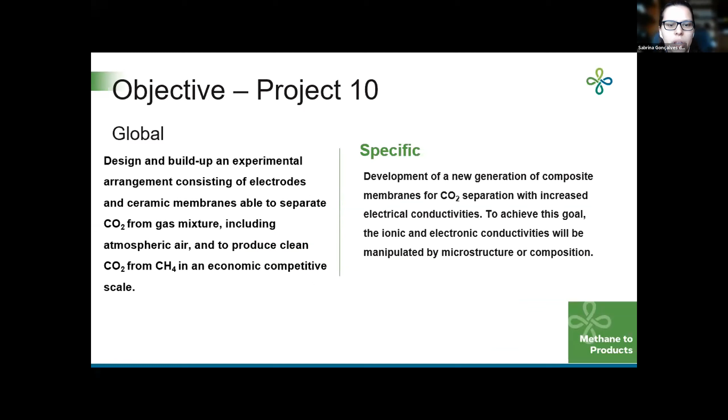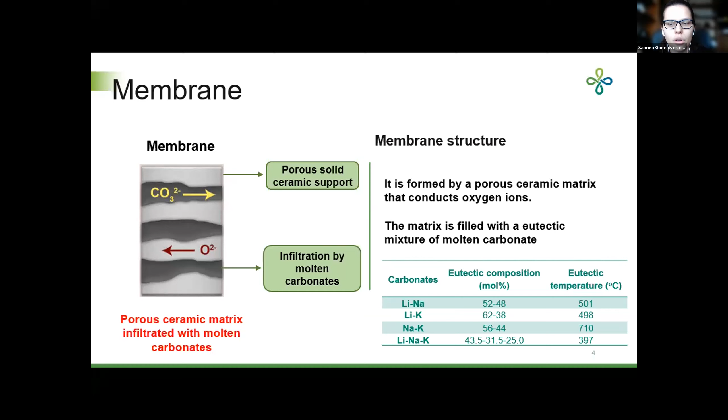So this image is a simplified sketch of the membrane. It's formed by a porous oxygen ion conductive ceramic matrix that is filled with a eutectic mixture of molten carbonate. So this matrix can be produced using different methods, such as cold pressing, tape casting, deposition, and many others. But the important thing is that after sintering, it remains porous, so it can be infiltrated by the molten carbonate. And usually, eutectic mixtures of carbonates are used to lower its melting temperature. And it's possible to choose the best mixture depending on the temperature of use and the conductivity of each one.

So how does the membrane work? The separation mechanism is based on the surface reaction between the CO2 from the feed side with the oxygen ions from the ceramic phase to form the carbonate ion. This carbonate ion is transported through the membrane to the other side, and the reverse reaction occurs, releasing CO2 on the permeate side and the oxygen ions back to the ceramic phase to start the reaction again. So the driving force of this permeation process is the difference of the partial pressure of CO2 on each side of the membrane.

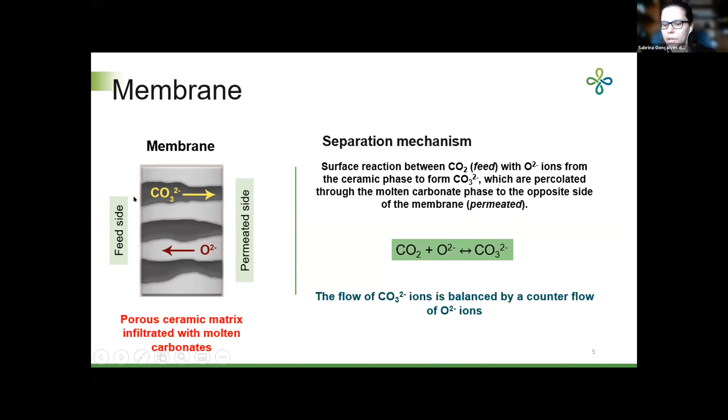So in practice, we can consider that these two phases of the membrane are like parallel cells with ionic resistors and cell thermodynamic voltage associated. This is a simplified electrical circuit here. And since there is no current flowing outside this electrochemical cell, this formal parallel arrangement, in fact, originates a series type association. And for the CO2 to be transported through the ceramic membrane, the flow of carbonate ions needs to be balanced by a counterflow of oxygen ions.

If one of the resistances is higher than the other, the membrane efficiency will be limited by the most resistive component, that in this case is the ceramic phase. So have in mind that the permeation rate of the membrane is limited by the high resistance of the ceramic. To improve the efficiency of the membrane, we need to improve the conductivity.

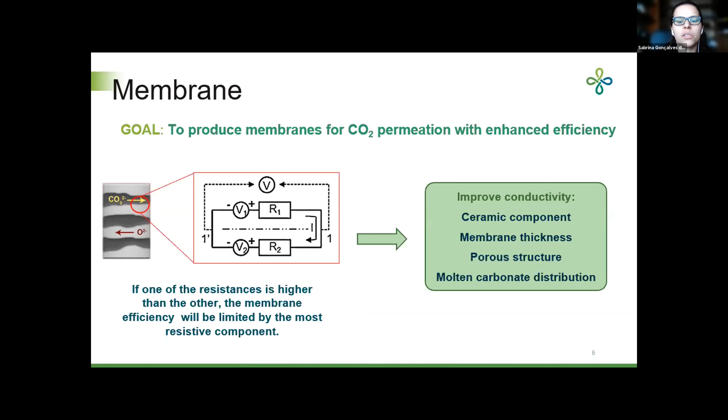With that in mind, we can think of different strategies to improve the conductivity, such as changing the ceramic materials to be used, or somehow improving the conductivity of these materials, decreasing the thickness of the membrane, and maybe changing the pore structure in order to decrease the tortuosity, and also studying the molten carbonate conductivity and distribution inside the membrane. And so considering these parameters, to improve the conductivity and the permeation, we came up with some strategies in order to improve the final membrane.

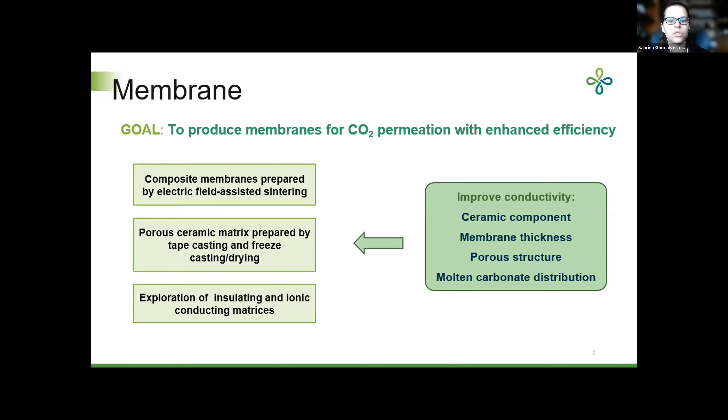And today I will present the main results that we have so far on composite membranes prepared by flash sintering and also the results obtained from the preparation of porous ceramic matrices using tape casting and freeze drying techniques, where we could decrease the thickness of the membrane and also change the pore structure. And we also are studying the use of insulating and ionic conductive matrices to investigate the conductivity of the molten carbonates.

So first, I will present the results of composite ceramic membranes prepared by flash sintering. The purpose of this work was to obtain the membranes using flash sintering and produce membranes with increased conductivity using lower sintering temperatures and a simplified processing.

So the materials used for the membrane were Gadolinia-Doped Ceria for the ceramic phase and a eutectic mixture of sodium lithium carbonate for infiltration. And the membranes were prepared by two different methods. The traditional one, where we cold press the mixture of Gadolinia-Doped Ceria with a pore former. Then the pellet was sintered and infiltrated with the molten carbonate.

And also the sample produced by flash sintering, where we prepare a mixture of Gadolinia-Doped Ceria with the eutectic mixture of carbonate. This mixture was cold pressed, and the sample was positioned between two platinum electrodes connected to a power supply, applying an electrical field of 200 volts per centimeter at a temperature of 420 degrees C to produce the dense membranes.

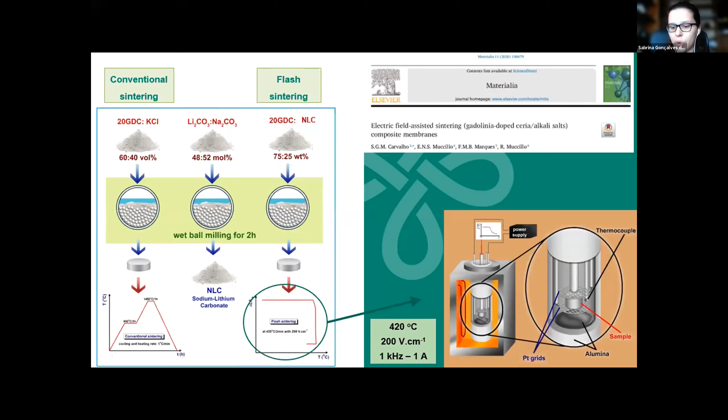This is the Arrhenius plot of the electrical conductivity of those samples. In blue, we have the electrical conductivity of the composite membrane produced by flash sintering, by infiltration in green, and a pure dense Gadolinia-Doped Ceria in red. It's interesting to notice that the electrical conductivity of the dense GDC exhibits mostly a linear behavior in the entire temperature range, showing that the electrical conductivity of the sample is dominated by the conduction only of oxygen ions.

And the ceramic pellets containing carbonate have dominant mechanisms depending on the temperature range. At temperatures below 400 degrees C, the conductivity is basically due to the oxide ions. From 400 to 500 degrees C, the electrical conductivity increases steeply due to the contribution of molten alkaline carbonates. And at upper temperatures, the conductivity follows again an Arrhenius behavior, a situation ascribed to the carbonate and the alkali ions using the molten salt pathway.

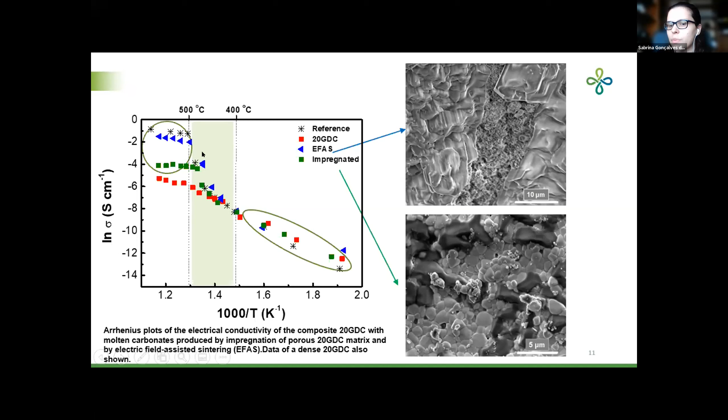So the samples produced by electric field assisted sintering in blue showed a higher conductivity than the samples obtained by infiltration, as we can see here. We do not have yet the permeation results for the membranes produced by this method, but the conductivity results allow us to expect good values.

Now the results of the membranes produced by tape casting and freeze drying. These samples were prepared during a period of 6 months that I spent at Forschungszentrum Jülich in Germany in the first semester of last year. And during this time, it was possible to prepare the samples and begin some characterization of the material.

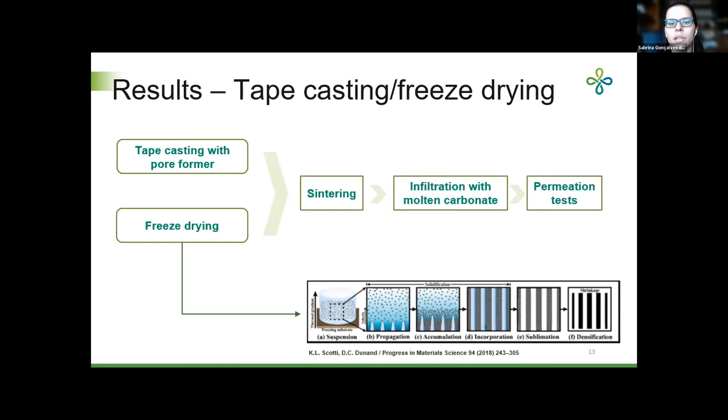So in this work, we also use the same type of powders, Gadolinia-Doped Ceria as ceramic powder and sodium lithium carbonate to infiltrate. Basically, the samples were prepared by tape casting using rice starch as pore former, and also porous matrices were prepared by freeze drying, which is a technique that uses water and rapid unidirectional freezing to produce those aligned pore structures. Both samples were sintered, infiltrated with molten carbonate, and the permeation tests were performed.

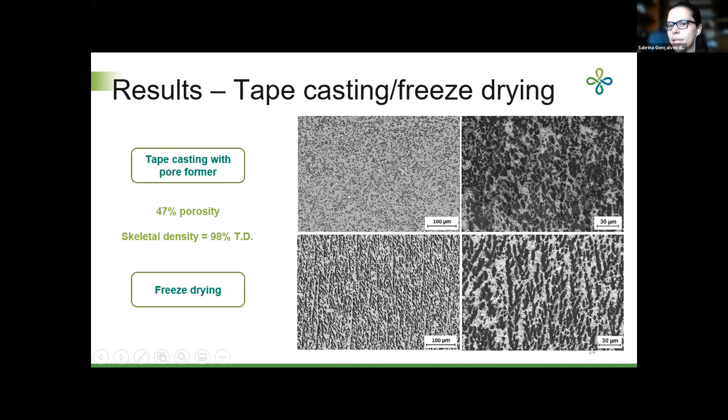So both tape cast and freeze-dried samples had similar values for porosity and skeletal density, but we can see in these images that the pore structure is significantly different. The pore structure of the freeze-dried matrix has more aligned pores in one direction, while the tape cast samples have randomly distributed pores.

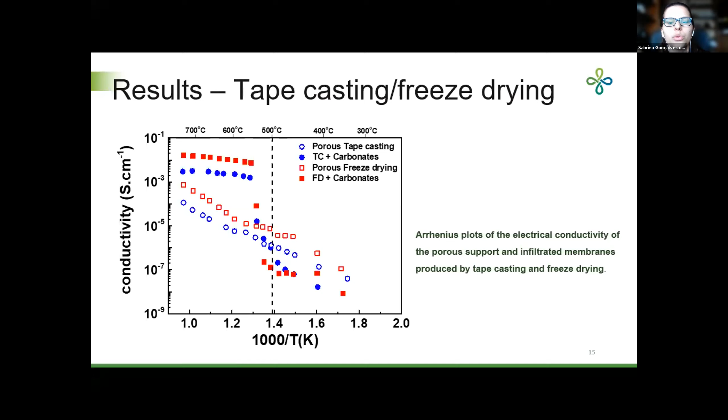What is interesting to notice here is that the freeze-dried samples showed a higher conductivity for both porous support and infiltrated membranes due to their aligned pore structure and consequently lower tortuosity of the charge transport across the transport direction. So aiming for a greater CO2 separation, we used the freeze-dried membranes to perform the permeation measurements. Here are the results of the permeance that we obtained.

The permeation tests were performed using 20 volume% of CO2 as feed gas. And the CO2 that permeated was measured during heating and cooling of the membrane between 600 and 850 degrees C. And at 800 degrees, we obtain a good value, a high value of permeance.

And it's interesting that the activation energy for permeation, that is the energy necessary to start the formation and the transport of these carbonate ions, lies between the activation energy of the oxide ion and the typical value found for molten carbonate.

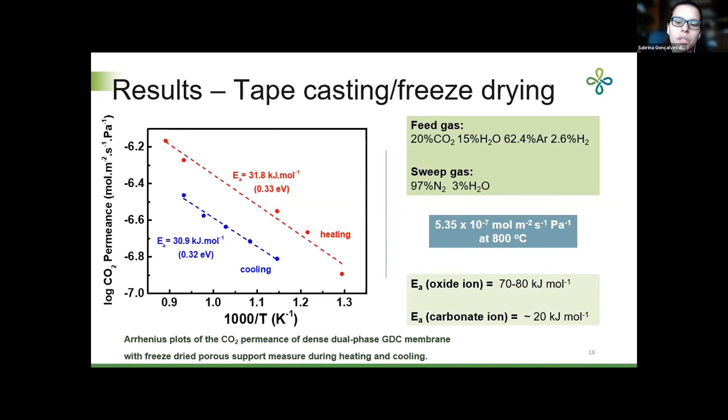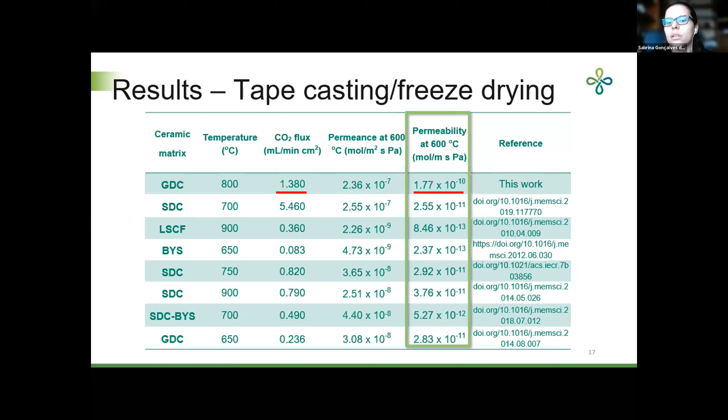And considering that the efficiency of the membrane depends on its thickness and on the gas composition of the feed and the permeate side, the permeation data were compared considering the permeability of the membranes in each experiment. So the membranes produced by freeze drying, despite presenting the second highest flux of CO2, showed the highest permeability values at 600 degrees C when temperature, membrane thickness, and CO2 partial pressure are considered.

And our last result is an image of a study being developed by a PhD student of our group, which attempts to study the conductivity of the carbonate and the entire membrane using different ceramic matrices. In this case, it is a zirconia doped with magnesium oxide. One minute. Infiltrated, okay, infiltrated with sodium potassium carbonate. And impedance measurements are being performed to analyze the conductivity, and the permeation tests will be performed later in the chamber that we have available in the lab.

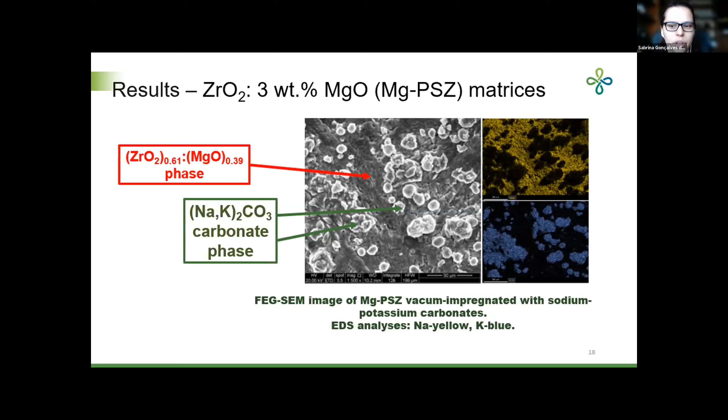And to summarize, the membranes were successfully obtained by flash sintering at a temperature of 420 degrees C. And those samples have higher electrical conductivity than the membranes obtained by infiltration. And in the study of freeze drying membranes, the side-to-side aligned porosity of the samples prepared by freeze drying had a significant impact on the electrical properties of these composite membranes. We could improve the conductivity.

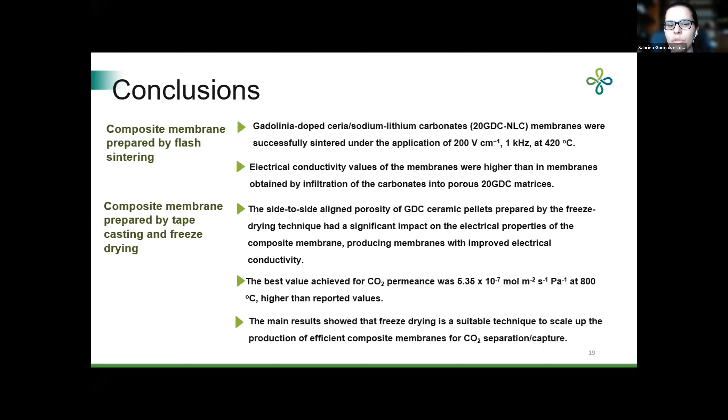We achieved a high permeance value for this membrane, and these results show that freeze drying is a suitable technique to scale up the production of efficient composite membranes for CO2 separation and capture.